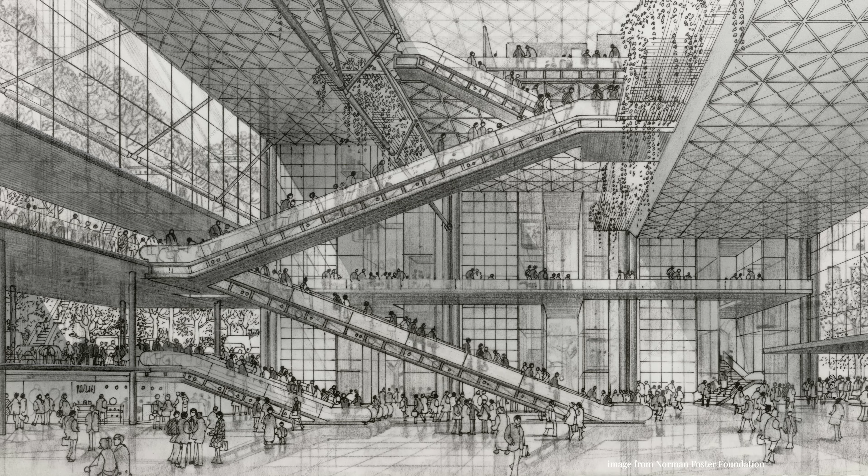This was one of the most expensive buildings built in the world. Designed by one of the greatest architects of all time, it was the epitome of the high-tech architecture movement. It was so advanced that it couldn't even be fully built in Hong Kong. Much of it had to be built overseas first and then shipped over like giant Lego pieces. They brought together some of the brightest minds in the world and pulled off some of the most audacious innovations, like installing this giant sun scoop to reflect light into a building.

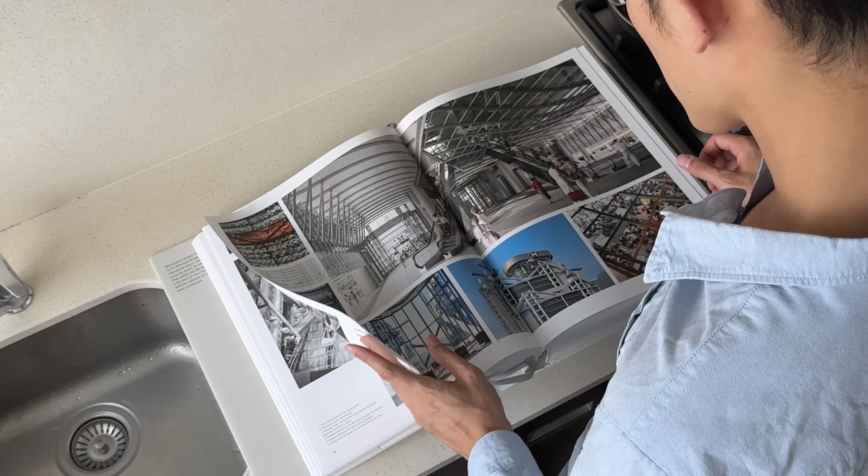But does it actually work? And what's the deal with these beams on the outside of the building? Aren't they supposed to be holding it up from the inside? And what happened to the ground floor lobby? Wait, where is it? Oh, and what are those? I spent weeks deep diving into this building, poring over hundreds of pages and analyzing countless drawings. I've now distilled the most fascinating insights in this video, and trust me, you don't want to miss this.

At the time of completion, this building reportedly cost over 5 billion Hong Kong dollars. To give you some perspective, another bank building constructed around the same time, just down the road, reportedly cost only 1 billion. Yep, that's 1/5 of that. That means the amount of money spent on this building could have bought you 5 of these. So why was it so expensive? And was it even worth it? Well, my answer might surprise you.

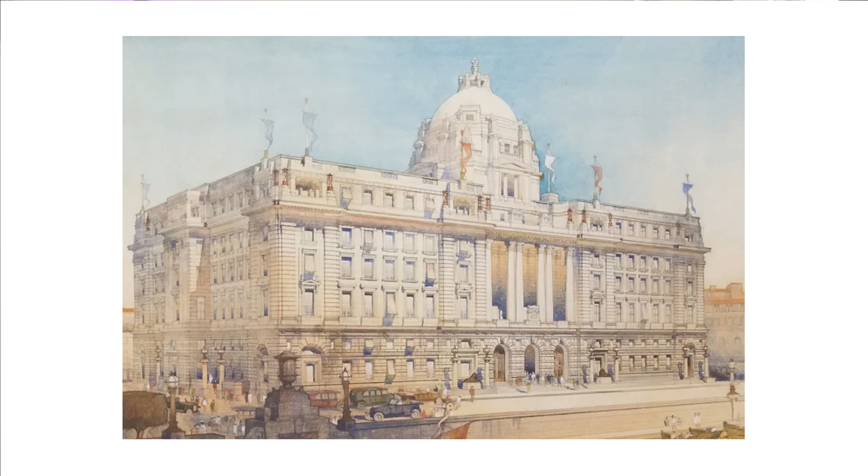First, we have to go back in history and understand who could even afford such a building, and why. The Hong Kong Shanghai Bank had occupied the site for over a century, and it had a history of owning grand buildings. The previous building was an architectural marvel of its time. One of the tallest buildings in Hong Kong, it exuded grandeur. It was a symbol of their status. And when they commissioned their Shanghai headquarters, the instructions were to spare no expense, dominate the Bund. So naturally, the brief for this new Hong Kong building was to be the best bank building in the world.

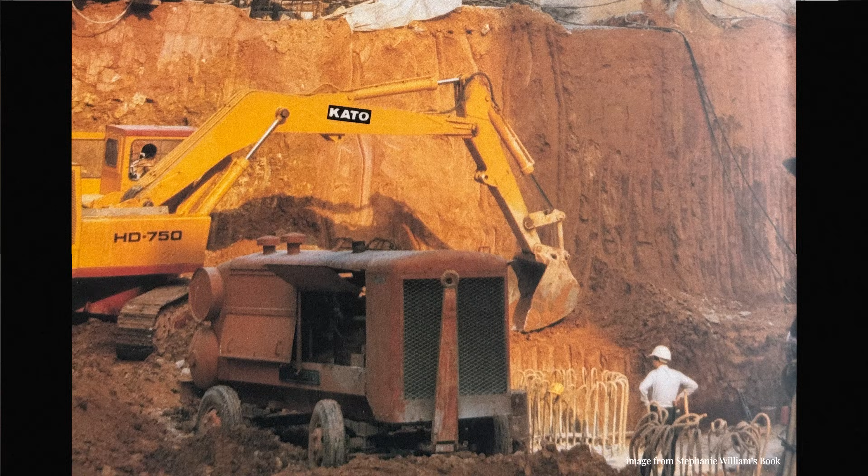However, this building was believed to be a crucial element in the feng shui of the whole colony. The building stopped all the good fortune running down the hill and into the harbour. Hence, removing it would have threatened the stability and prosperity of Hong Kong. In fact, following the demolition of this building, and when excavation reached bedrock, the Hang Seng Index plummeted to half its value from the previous year. So when the bank approached architects for proposals, they were asked to investigate options to keep part of the existing building in operation during construction.

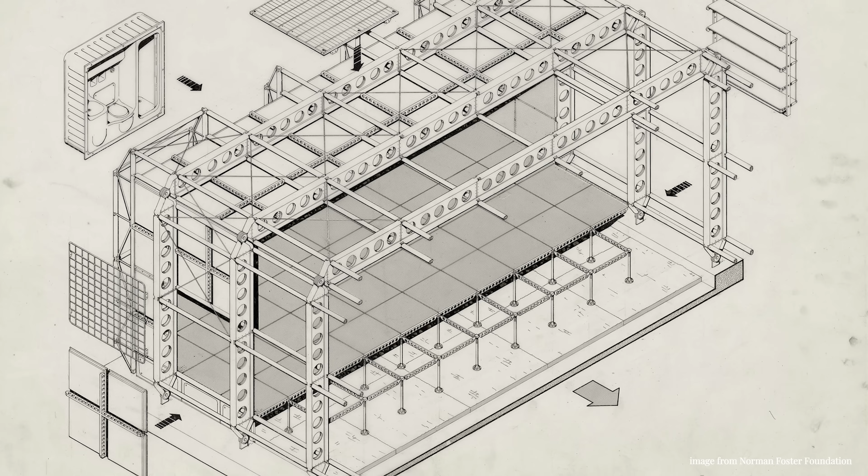They sought the best architects in the world, ones with international reputation and proven experience in building a tower. Yet after reviewing several architects' proposals, they decided to commission Norman Foster. Norman, at that time, had not built anything over 4 stories high. It was actually his emphasis on flexibility in his proposal that stood apart from the rest of the competitors. In Foster's proposal, he detailed how the construction of the bank could happen in several phases. Foster first proposed to construct structural cores on both sides of the site, and then bridge the office floors over the existing banking hall. This allowed the banking hall to be in operation as they built the tower above.

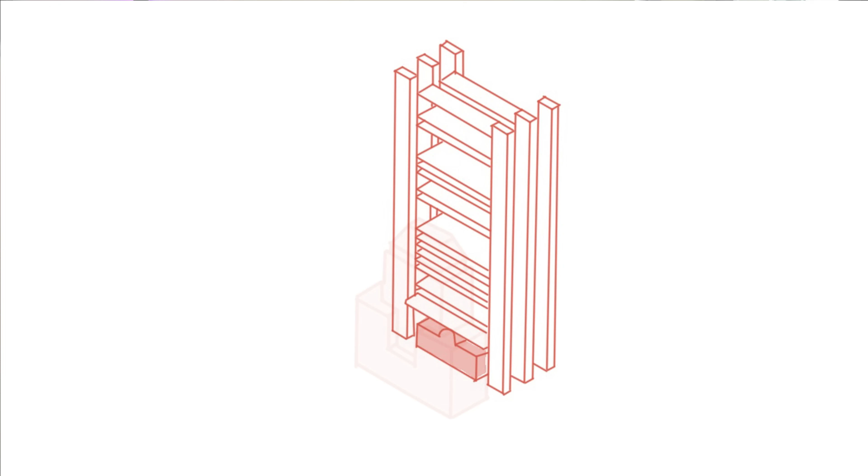And when the new tower was completed, the bank could move everyone into that new tower and demolish the old building. Or not, the bank had the option to retain the front tower if they wanted to. And when they were ready to demolish the old building, the new tower could extend forward in a similar construction sequence by introducing additional cores. This idea of having cores on the side of the building was quite revolutionary at that time. Most towers at that time had structural cores in the middle of the building. This wouldn't be possible if they wanted to keep that existing banking hall.

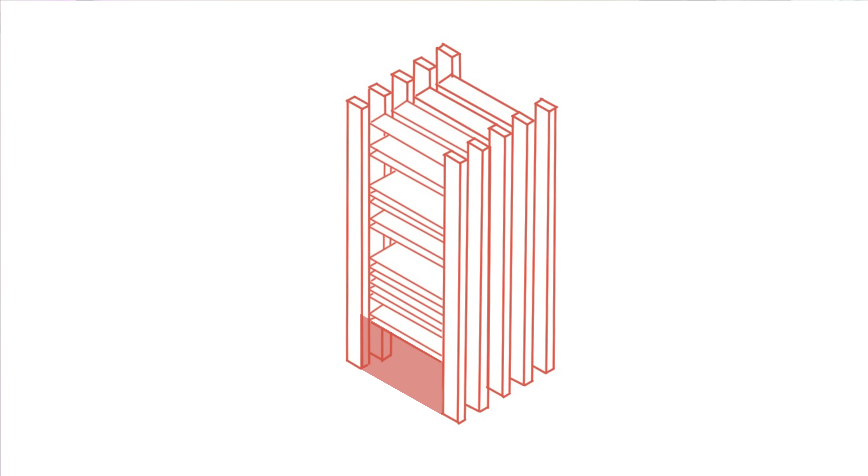But in the end, the bank decided that it wasn't worth keeping, and they decided to just fully demolish the old building and make way for the brand new building. So the original idea to bridge over the banking hall wasn't even necessary anymore. But Foster still saw value in elevating the banking hall above the ground, and leaving the ground floor completely open to the public. Now, Hong Kong property prices are among the highest in the world. This ground floor is prime real estate. To give this up was a bold move.

But what most people don't know is that by offering this public space, the planning authorities would have allowed them to put in approximately 14,000 square meters more. That's potentially a few additional floors. So this design created a true win-win for both the city and the bank, especially on the weekends. While most ground floor lobbies in the CBD are lifeless on weekends, this space is anything but. It transforms into a vibrant civic hub, a place for social gatherings, and an urban shortcut for the site. Every weekend, the Filipino community gathers here, making full use of this space. Under the space, you are protected from the sun and the wind, and that's why these glass panels extend down so low.

So you will notice that between these massive columns, there are no other columns in the middle. So the whole building is, for the most part, completely suspended above. I feel that this piece of engineering ingenuity is not nearly appreciated enough. So I'm going to try to explain to you how incredible this structure is.

Firstly, the building structure is mostly made of steel, a lot of steel. And all this steel came from the UK. They searched for many companies, and the company selected in the end was actually known for building bridges. The defining feature about this structure is of course the trusses. They are held up by these masts, which are comprised of 4 steel columns connected together.

Connected to these trusses are these hangers, which help pull up all the floors below, and that's how they're able to keep the space below column free. It's kind of like how a bridge structure works. This bridge structure is then repeated a few more times and stacked on top of each other.

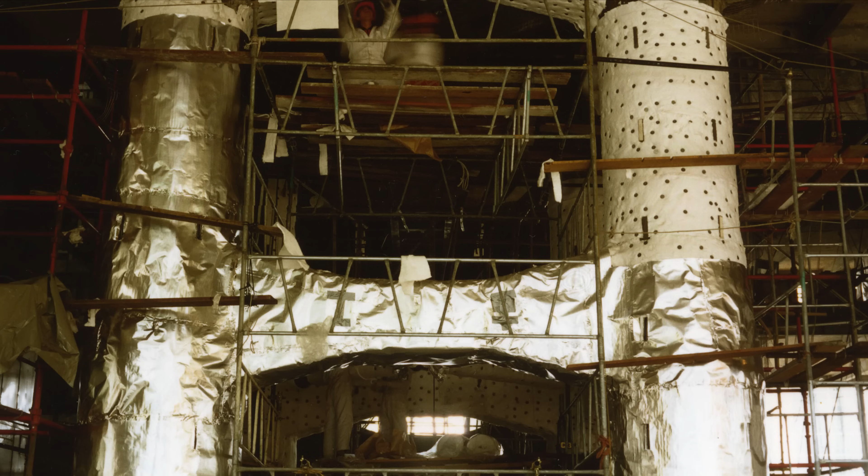This cementitious barrier coating was an entirely new process. Innovation was at the heart of this project. The cladding system, along with many other aspects of this building, emerged from extensive research and development.

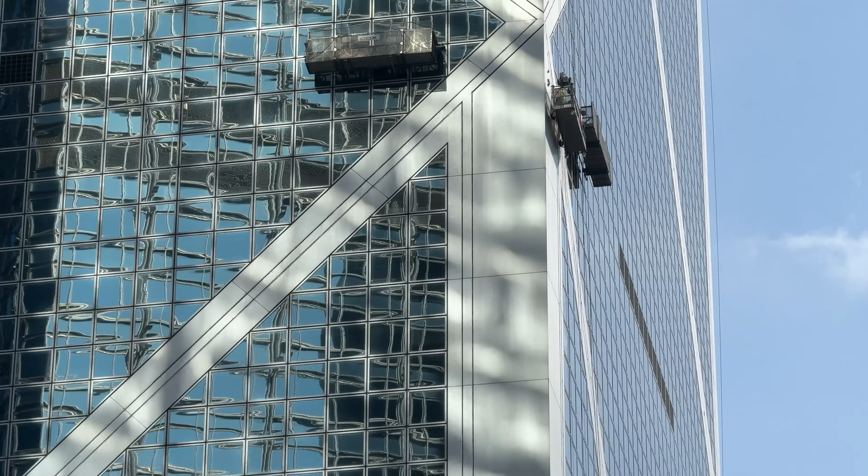Sorry, after filming this video, I realized I forgot to talk about this. There was so much about this building that I couldn't fit. These are actually not cannons. There were rumors that they were installed to fend off bad feng shui. They were just BMUs, building maintenance units. It's a crane-like structure that helps staff clean the windows. That's it, now back to the video.

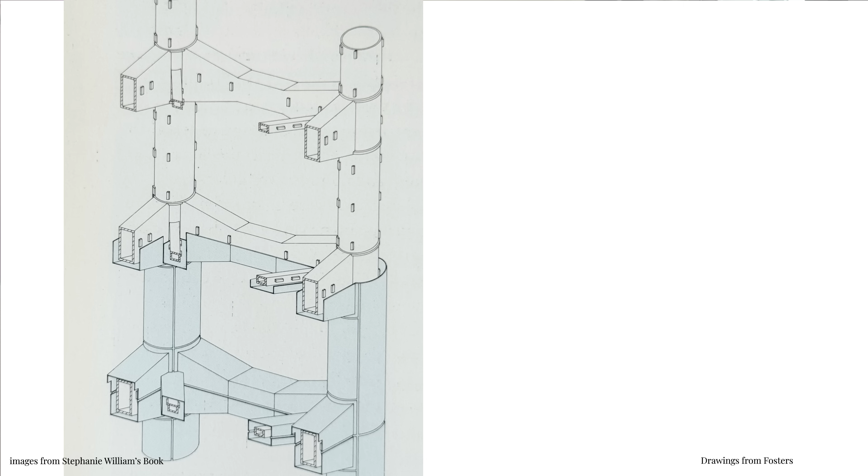Another complication of having the structure on the outside of the building was that the structure would penetrate the walls and the glazing at various locations. Now steel expands and contracts. All these junctions have to resist water penetrations during extreme conditions, such as typhoons. So these aluminium coatings had to fit like a glove. Individual panels were manufactured to the tightest tolerances.

Cupples, the American company who fabricated all the cladding and the glazing for this project, had to go and acquire these robotic welding machines and advanced cutting machines from Germany that could cut within 1/1000th of an inch. That's 0.0254 millimeters. The client really insisted that they research all possible international possibilities for sourcing, developing, or fabricating every part of this building. They were able to marshal the world's best resources.

The structure for the glazing was also placed on the exterior. Those circular mullions on the outside are something you often don't see, and it took me a while to really appreciate it. To see so much articulation of the facade and the shadows it casts, it really breaks down the scale of the building. And I know this is such a weird, esoteric thing to say, but I guess you really need to see the building without the mullion as a structure.

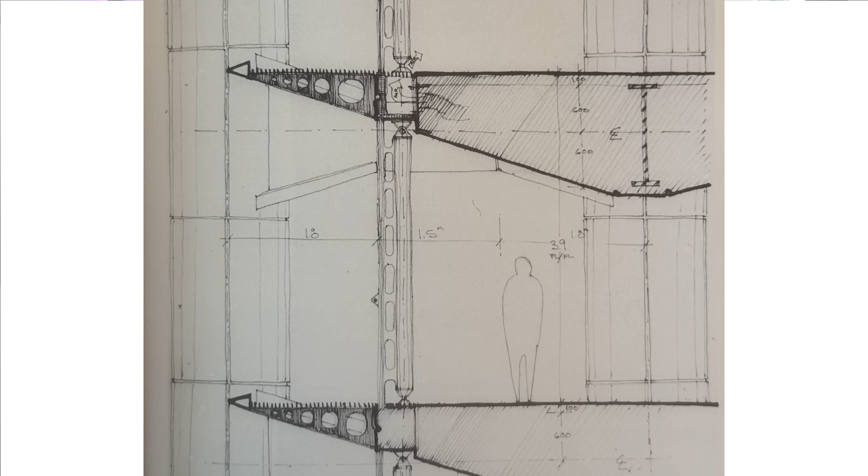And I really love the sun shading structure. Close to the window, they're designed to be a compact grille for maintenance staff to walk on. And on the outer edge, they plotted the angles of each blade so that it didn't block your view looking down. These angles also helped with the sun shading at the top. And the most beautiful thing about this is this tapered angle that follows the angle of the ceilings inside. A very elegant solution.

And speaking of sun, we need to talk about the sun scoop. Like I mentioned earlier, it was designed to direct sunlight into the banking hall and into the public plaza. So let's go check it out. I waited till the sunniest time of the day and made sure there was nothing overshadowing the scoop. As soon as I got in there, I realized there wasn't much sunlight at all. The bank relied heavily on artificial lighting. But how could this be?

I remember reading that this was thoroughly tested by a lighting consultant in Austria. They used large-scale models and artificial skies to test the level of lighting in the bank, and I'm pretty sure I saw old photos of sunlight coming in. But later, I was able to get a better view of the sun scoop and realized that they had all the window blinds down. And it seemed like they had it down all day, every day. Something must have gone wrong.

Nevertheless, the banking hall is still a very impressive space. You can't help but look up when you're in the space. Many compare it to the Cathedral of Commerce. But for me, what's more exciting is actually the journey from entering the building from under the building and seeing this impressive glass belly and traveling right through the middle of it.

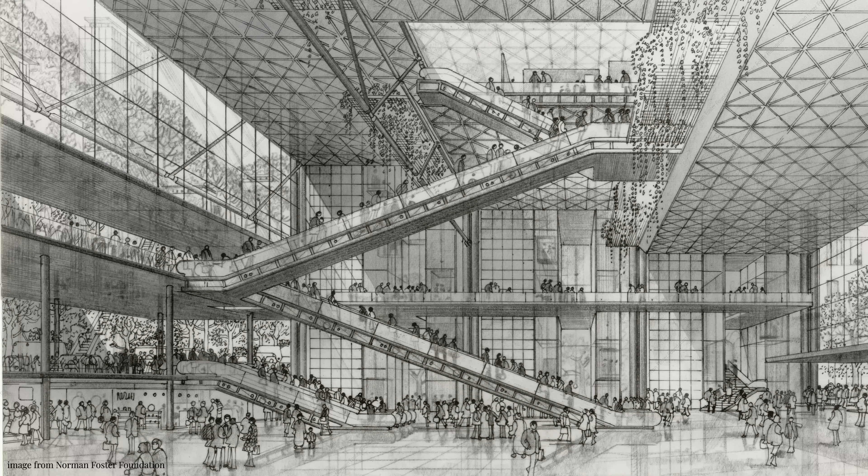These escalators were also implemented throughout the office floors. Foster really wanted to make this part of the everyday circulation system of the bank. The initial idea was to only allow these high-speed lifts to open out to reception areas at these double-height floors. The staff then had to utilize these escalators to reach their desired floors.

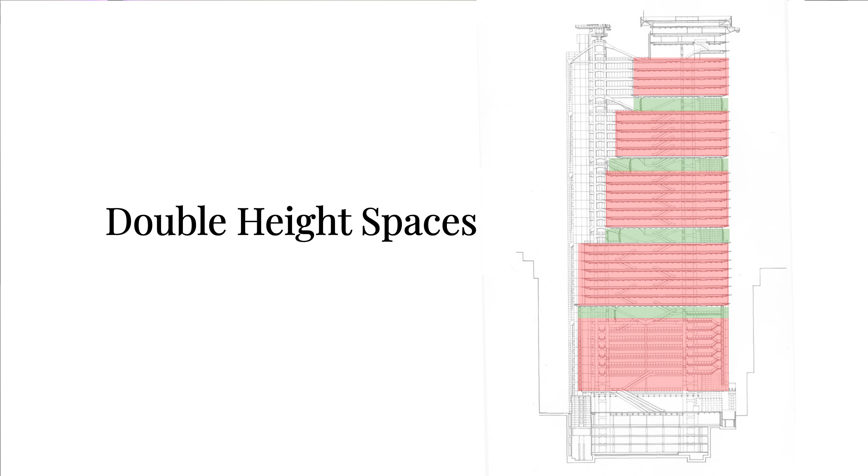Foster's claimed that this escalator reduced the amount of lifts, while adding a social dimension, speeding up circulation and fostering interaction between floors. His concept of vertical villages grouped several floors into connected spaces, separated by double-height terraces. These double-height spaces served as communal areas between the villages. This was very different from how most conventional offices were arranged.

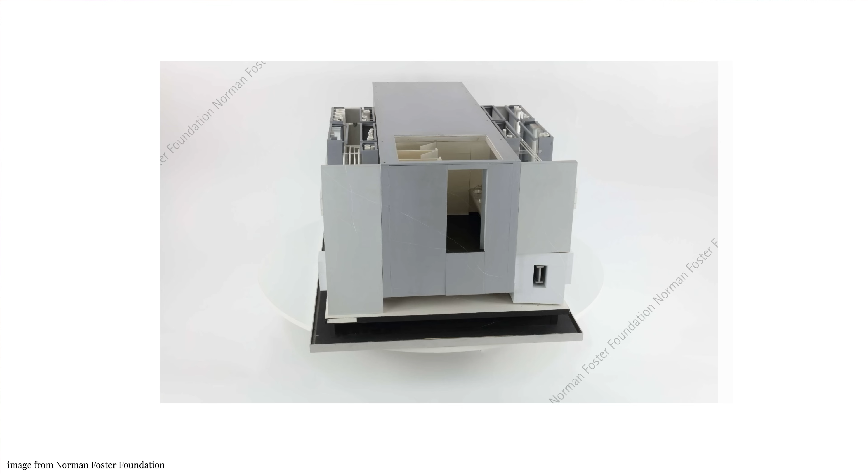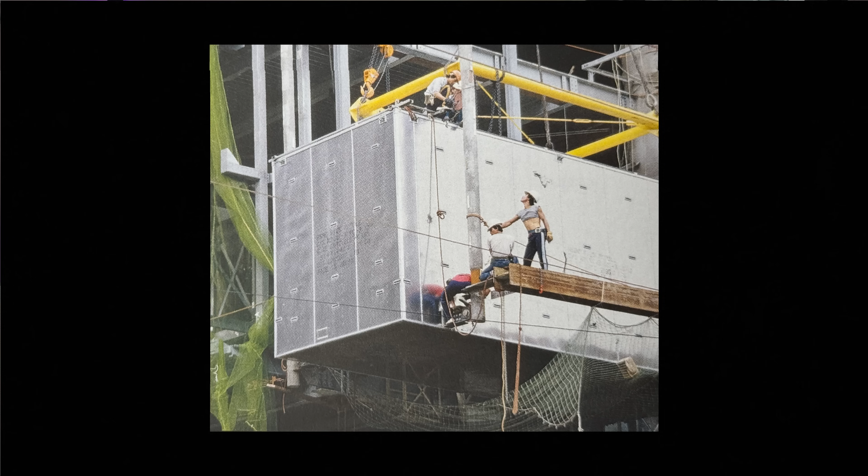Another fascinating aspect of this building was the toilets. The toilets were all completely prefabricated in Japan, just like cabins. Built with predominantly stainless steel, they came fully fitted with a basin, doorknobs, locks, and taps. Every little detail was custom designed, even the toilet roll holders. So they were completely finished in Japan first, then shipped to site and slotted onto the side of the buildings. I mean, how cool is that?

These stainless steel bathrooms had to come in under a police escort on a special low-height trailer along a special route where all the overhead signs had to be removed. They could only fit 2 every night between midnight and 6 AM. A lot of the building services equipment were also installed in this manner. There were so many of these modules that 3 Japanese companies had to join forces to bid for this project.

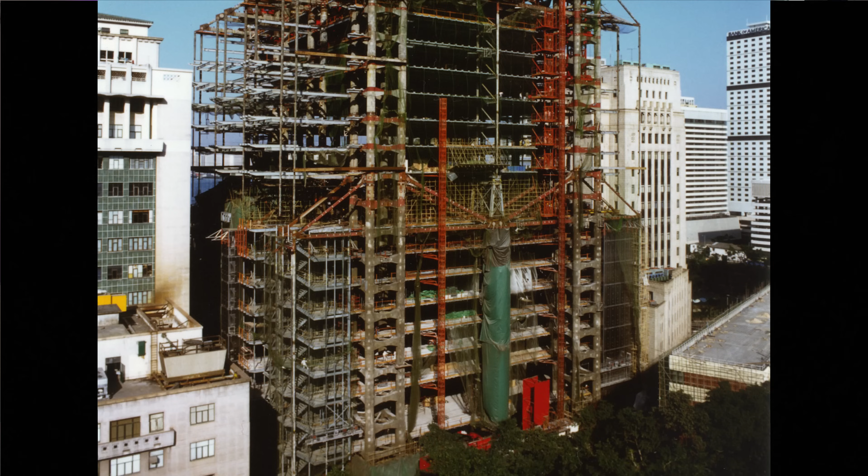The benefit of these prefabricated modules was speed and quality. The toilets were fabricated in a clean and controlled environment of a Japanese workshop. They were able to start building these before the building structural steel even arrived on site. The project was under an incredibly tight program. The time that we were given was considered to be 2/3 of the average time in Europe.

I mean, they had to start building before they even finished designing the building. And for the majority of that time, they were working 24/7 on site. And at one point, there were over 3,500 workers on site. At Foster's office, the average working day was 12 hours, 6 days a week. Everything was drawn by hand back then.

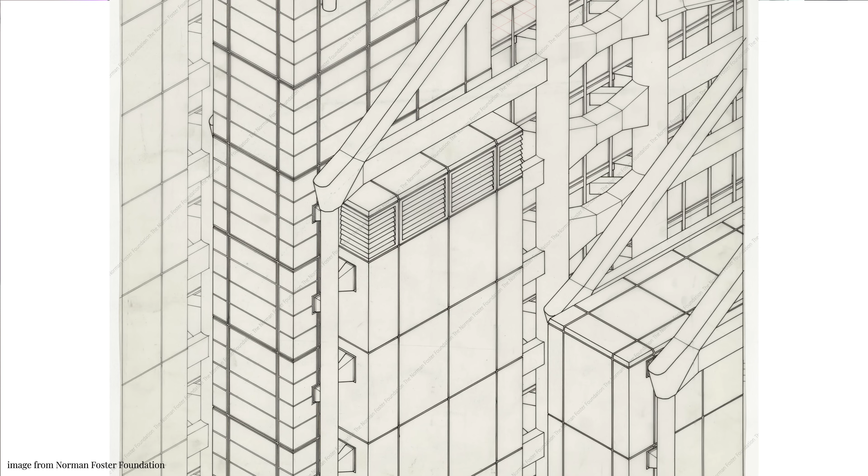They first started with about 12 people in Hong Kong, but at one point they were criticized to be understaffed. So Foster's moved 40 of the London staff members and their families to Hong Kong. The team ended up growing to over 120 people. That amount of people on this project was bigger than most architectural offices.

So was all this worth it? The title of most expensive building in the world had since been surpassed by many other buildings. But that was never the goal of the project. In fact, the initial budget for this building was much lower than it actually cost. There was a severe budget blowout, and at one stage they even considered abandoning the design and firing Foster's.

This building was under heavy media scrutiny. The building was making headlines around the world. How not to build a masterpiece. Oriental extravaganza. Yeah, this was during a time when Chinese people were still referred to as Oriental. The bank had to hire additional experts and consultants just to try to keep the project cost down. Foster's design was constantly challenged.

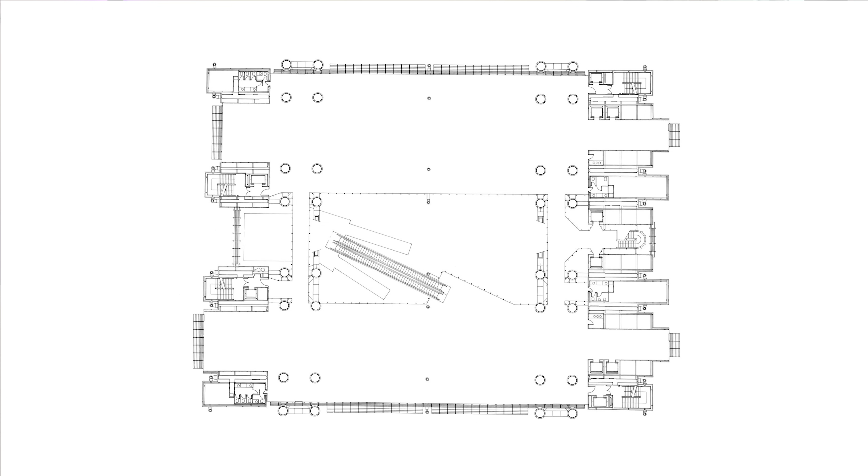They eventually hired these consultants from Hamburg to conduct this study comparing this revolutionary design concept to a traditional office tower. The study confirmed that this column-free, wide-span structure provided a higher gross rental yield, and there was a potential to expand the office floor. But more importantly, it was extraordinarily flexible with the ability to accommodate office rearrangement.

Because 18 months after the completion of this bank, 60% of the workplaces were changed with little cost and great speed. And by the end of the 1980s, the bank profits were up 38% since Foster was commissioned. The bank grew rapidly around the world, and a few years later, in 1993, they ended up moving its headquarters to London.

When I look at this tower, I'm in awe. I wonder if I'll ever be able to work on a project like this. To have a client ask for the absolute best. To be able to go around the world to find the best engineers, consultants, and contractors. To be able to design every little detail, including the toilet roll holder.

There were many times where the technology did not exist for what they wanted to build. So they just invented it. This project is remarkable because they were able to break the mold and do something truly different. And I think that's something to actually be proud of. Because if we all just continue to follow what's been done before, what would the world look like? If we continue to strive, to innovate, and to learn, there's no telling what wonders await us.